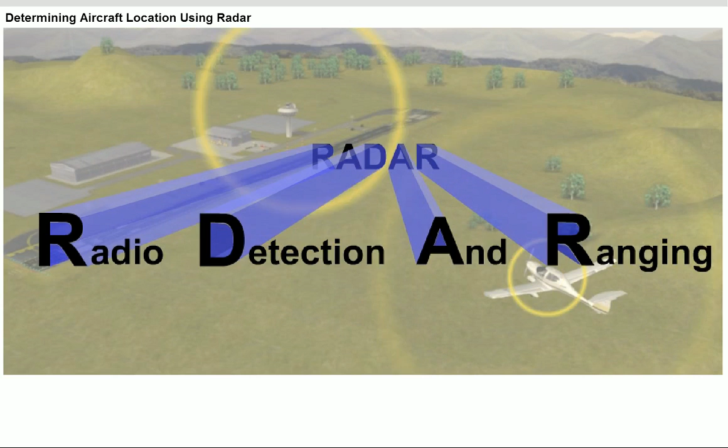Radar, which stands for Radio Detection and Ranging, is a ground-based electronic system that uses a synchronized radio transmitter and receiver to emit and detect radio waves in a narrow beam using a rotating antenna. When the radio waves strike your aircraft, some of the waves reflect back to the antenna. The primary radar system uses this information to display the location of your aircraft on the radar screen.

The system calculates your range, or the distance of your aircraft from the radar antenna, by measuring the time it takes for the radio waves to reach your aircraft and then return to the receiving antenna. The radar screen also displays the magnetic direction, or azimuth, of your aircraft from the radar site, based on the position of the rotating antenna when it receives the reflected portion of the radio wave.

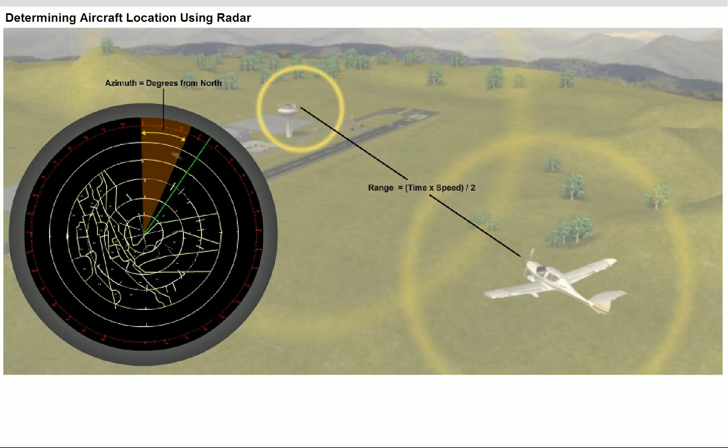Although primary radar displays your location on the radar screen, it provides the controller with no further information, such as your identification, altitude, or speed. To overcome these limitations, ATC might simultaneously use the air traffic control radar beacon system, which is sometimes referred to as secondary surveillance radar or simply secondary radar.

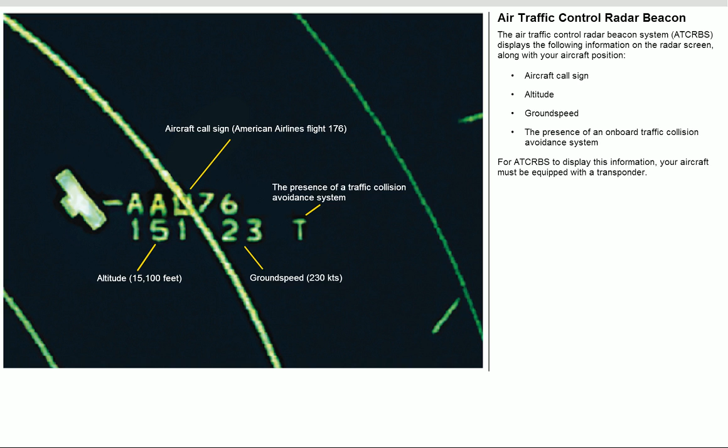This system displays your aircraft call sign, the altitude of your aircraft, and its ground speed. In addition, it indicates whether your aircraft is equipped with a traffic collision avoidance system by displaying the letter T. For ATCRBS to display this information, your aircraft must be equipped with a transponder.

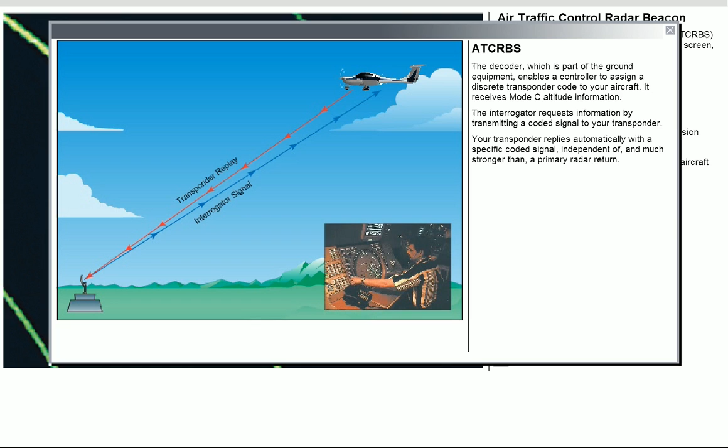The ATCRBS incorporates three components in addition to primary radar: a decoder, which enables a controller to assign a discrete transponder code to your aircraft; an interrogator, which requests information from your transponder; and a transponder, which transmits a coded signal in response.

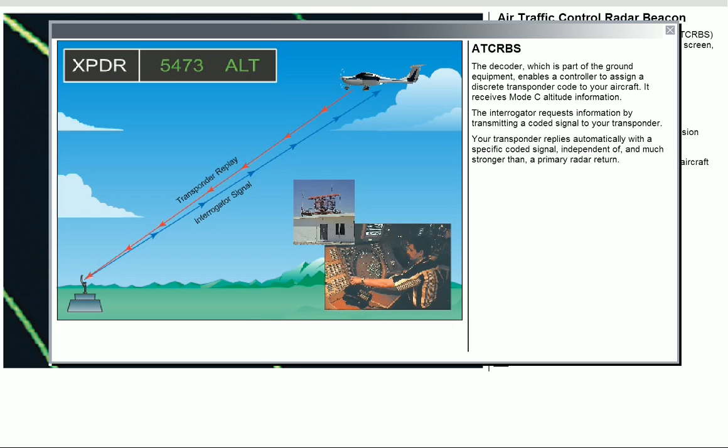In spite of its capabilities, radar has some significant limitations. Atmospheric temperature inversions can cause anomalous propagation, or the bending of radar pulses. If the radar beam bends toward the ground, extraneous returns known as ground clutter can appear on the radar screen. A beam that bends upward reduces the detection range.

In addition, heavy precipitation or heavy clouds can produce returns that block out the display of aircraft. Finally, terrain can block radio waves from reaching or returning from the aircraft.

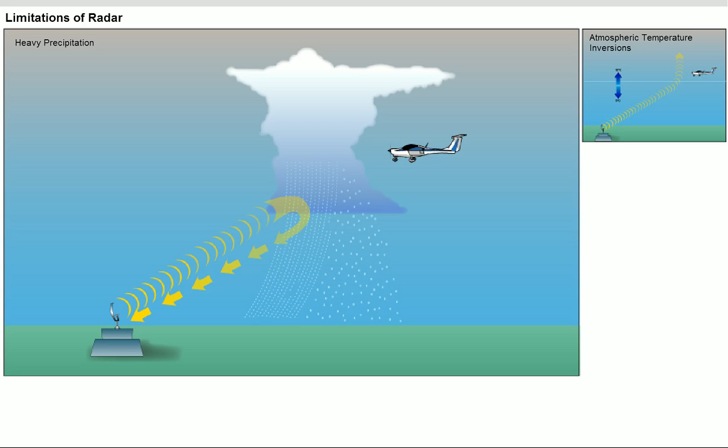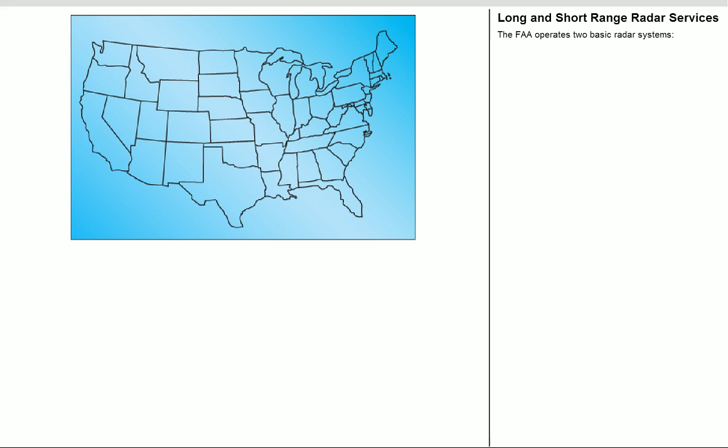The FAA operates two basic radar systems: air route surveillance radar and airport surveillance radar. Both of these surveillance systems use primary and secondary radar returns, as well as sophisticated computers and software programs that provide additional information to the controller, such as aircraft speed and altitude.

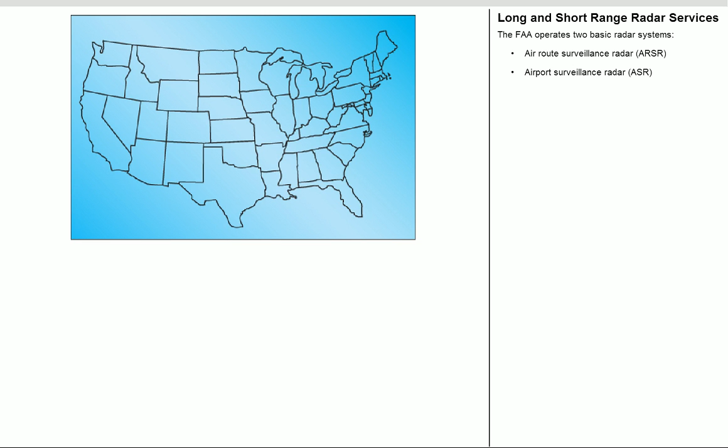The Air Route Surveillance Radar System, or ARSR, provides long-range information to help controllers manage traffic. Each radar site antenna can monitor aircraft flying within a 200-mile radius of the antenna, with some stations able to monitor aircraft as far away as 600 miles by using remote antenna sites.

Approximately 100 ARSR facilities relay traffic information to radar controllers throughout the country at 20 Air Route Traffic Control Centers, or ARTCCs. These centers issue IFR clearances and manage IFR traffic. However, depending on workload, these centers can also provide services to VFR pilots. For example, you might request flight following services, in which controllers provide traffic advisories to you. Because of their extensive radar coverage, centers can provide assistance if you become lost or disoriented.

Airport Surveillance Radar, or ASR, provides relatively short-range coverage, approximately 30 miles, within specific terminal areas. Terminal radar approach control facilities, called TRACONs, use this information to ensure safe separation of aircraft transitioning from departure to cruise flight or from cruise to a landing approach.

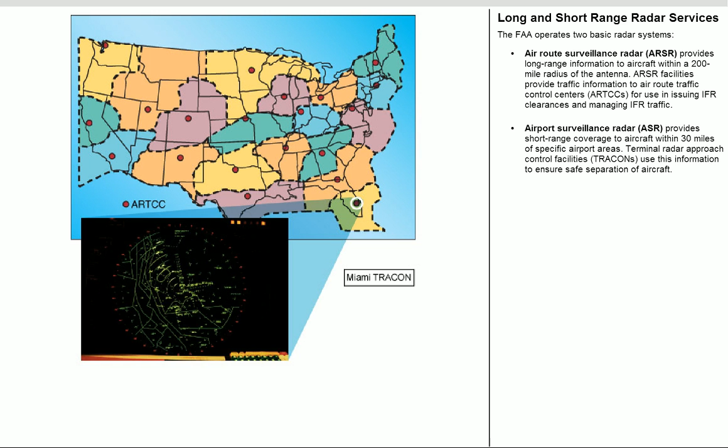Most ASR facilities throughout the United States use a form of the Automated Radar Terminal System, or ARTS. ARTS increases the number of aircraft that one controller can handle at a given time by reducing the amount of verbal communication necessary between controllers and pilots to relay position information.

ARTS equipment automatically displays aircraft position, altitude, ground speed, and other pertinent information on a controller's radar screen. ARTS continuously updates this information as the aircraft progresses through the terminal area. To gain maximum benefit from the system, each aircraft in the area must be equipped with a Mode C or Mode S transponder and the associated altitude encoding altimeter, although this is not an operational requirement.

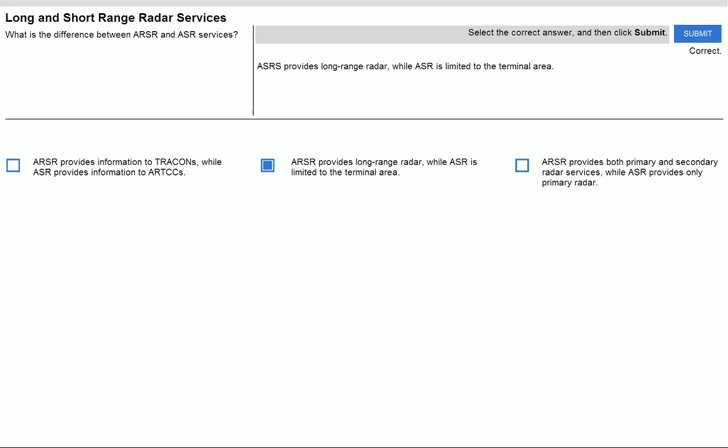Although radar can detect your aircraft without it, a transponder enhances the display visible on the ATC radar screen. The information displayed depends on the mode of your transponder. Basic transponders operate only in Mode A, which brightens the display and adds your transponder code to the radar screen. Your transponder code may be any of 4,096 different codes.

In addition to the basic features, Mode C transponders also provide altitude information to the radar screen. Mode C transponders are required in all Class A, B, and C airspace, within 30 miles of primary Class B airspace airports, and any time that you are above 10,000 feet.

Mode S transponders have advanced features including the ability to identify your aircraft to other aircraft equipped with Mode S transponders. For example, operation of the Traffic Alert and Collision Avoidance System, or TCAS, depends on Mode S transponder technology. There are other transponder modes, but they're not commonly used in the United States.

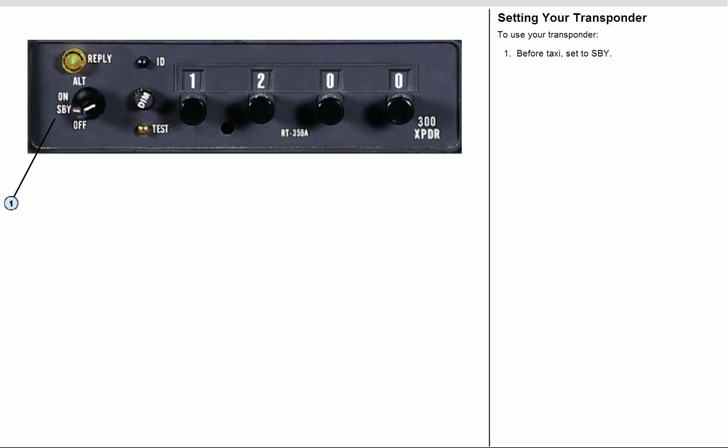To use your transponder, follow these steps. Before taxiing to the runway for takeoff, use the function selector to set your transponder to standby. In the standby position, the transponder is ready for operation, but it doesn't reply to interrogations. Set the transponder to the code assigned by ATC, or if you're flying VFR, select 1200.

A typical transponder can be set to display any number between 0 and 7 for a total of 4,096 possible codes. As late as practical before takeoff, change the mode to altitude or on. Use the on setting only if your transponder doesn't have Mode C capability.

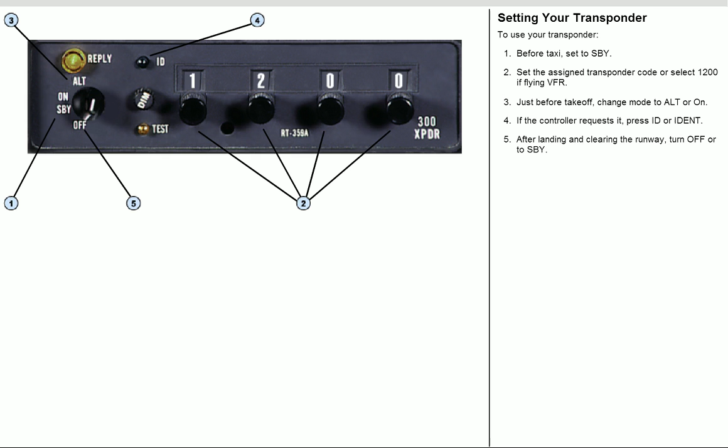If the controller requests it, press ID or ident. Pressing the ident button causes the transponder return to blossom on the radar screen for a few seconds, which enables the controller to establish positive radar contact. After landing and clearing the runway, turn your transponder off or to standby as soon as practical. To familiarize yourself with the transponder controls, click the dials to change the settings on this transponder before moving on.

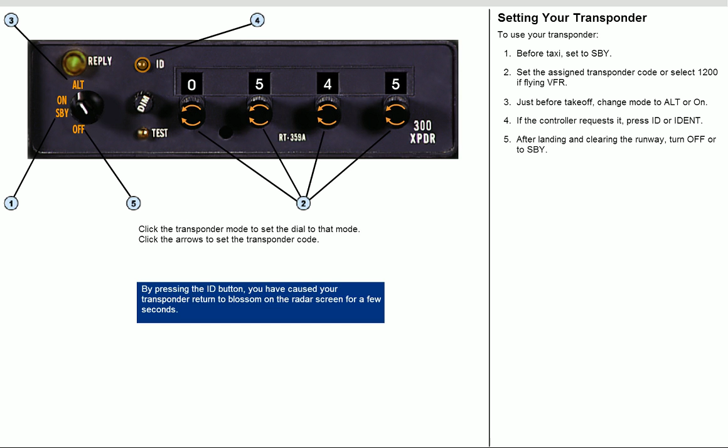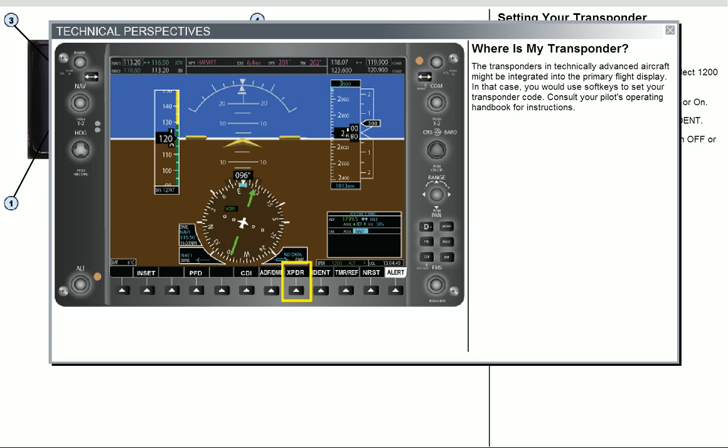Squawk 1257. Squawk standby. Stop altitude squawk. Squawk altitude. Ident. Squawk 1257 and ident. Squawk low. Stop squawk. Squawk mayday. Squawk VFR.

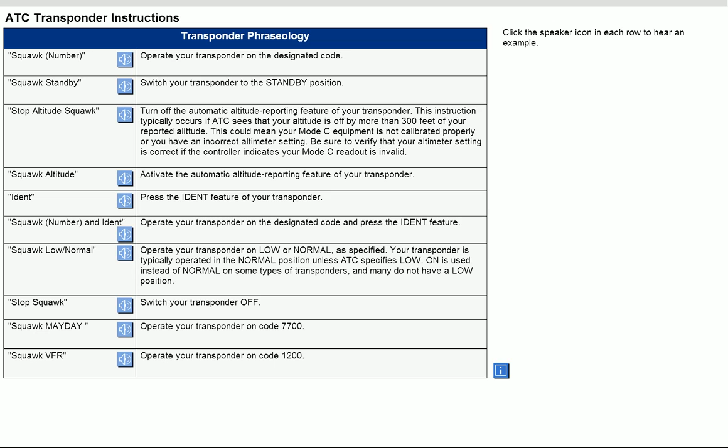In cases where your altitude readout differs more than 300 feet from your reported altitude, the controller will issue a Stop Altitude Squawk instruction. This means that you should turn off Mode C, but continue to operate your transponder in Mode A. This condition might mean that your Mode C equipment isn't calibrated properly or that your altimeter setting is incorrect. Be sure to verify your altimeter setting if the controller indicates that your Mode C readout is invalid.

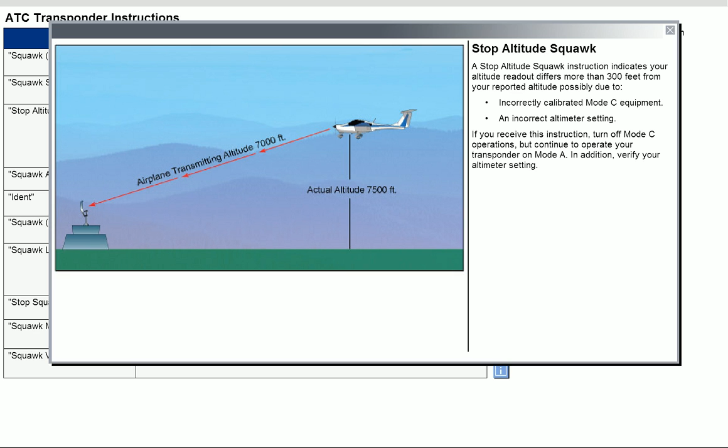Certain transponder codes are reserved for specific situations. The table lists the codes you should be familiar with. Because the emergency codes immediately alert ATC and activate an alarm, you should avoid accidentally dialing through these numbers, even momentarily. For example, if you want to switch from code 2700 to code 7200, switch first to 2200, then to 7200. Don't switch to 7700 and then to 7200. The simplest way to remember this is to avoid entering 7 into the first box as your first step, unless you're going to use an emergency code.

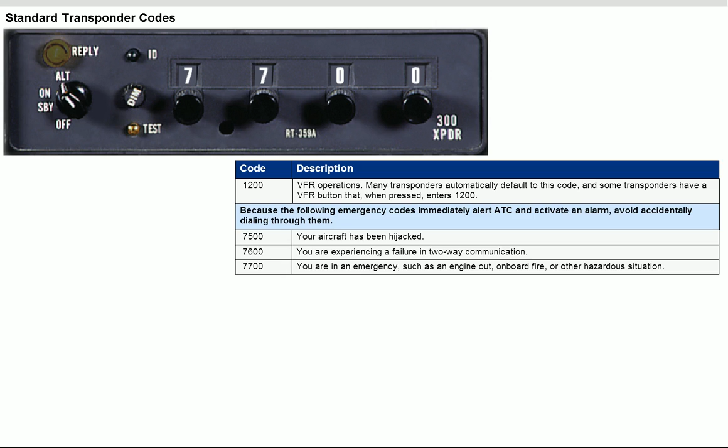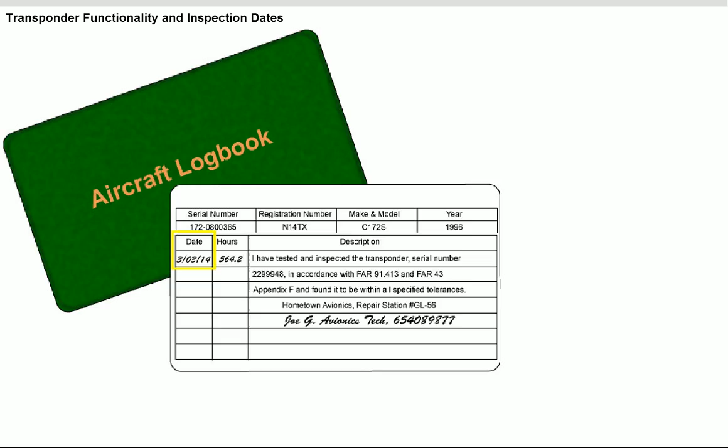Because transponder returns are the basis for radar separation, regulations require that transponders be tested and inspected every 24 calendar months for operations in controlled airspace. The inspection must be done by a radio shop and the results entered into the aircraft logs. In addition, if your transponder has a test button, it's a good idea to verify that all lights are working each time you fly.

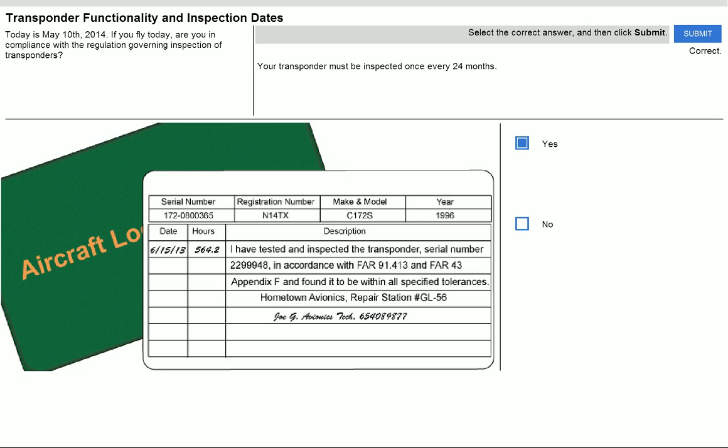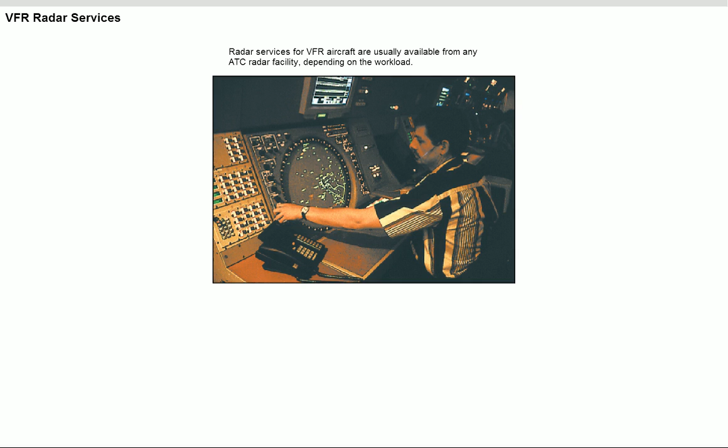Radar services for VFR aircraft are usually available from any ATC radar facility, including air route traffic control centers and airport surveillance radar facilities in terminal areas. The types of service depend on the facility and on how busy the air traffic controllers are, but can include any of the following. ATC radar facilities routinely provide traffic information to IFR aircraft. As the pilot of an aircraft flying VFR, you can request Radar Traffic Information Service, also called VFR Radar Advisory Service, to alert you to air traffic relevant to your flight.

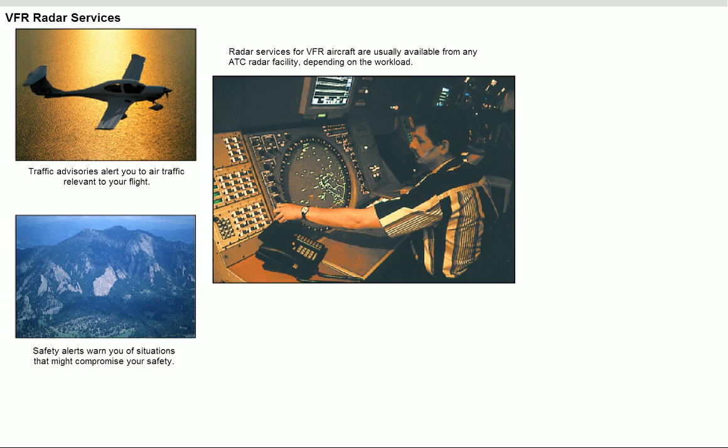ATC radar facilities issue safety alerts to aircraft under their control when, in the controller's judgment, safety might be compromised. For example, you might receive a safety alert if you're in unsafe proximity to terrain, obstructions, or other aircraft. ATC radar facilities might provide vectors to VFR aircraft in certain situations, with the understanding that the navigational guidance information is only advisory, and the job of flying the aircraft safely remains with the pilot.

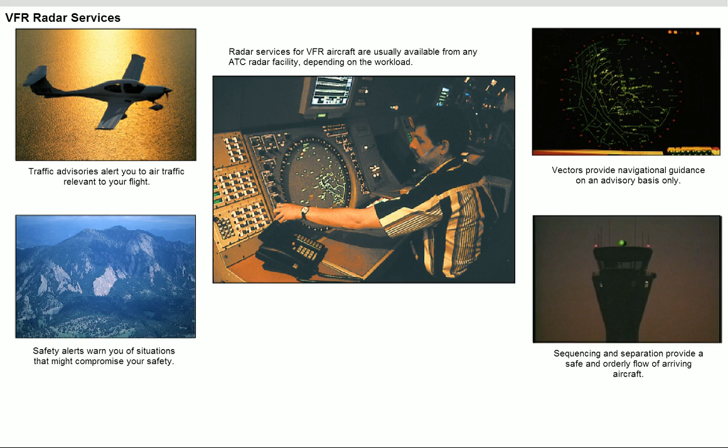ATC facilities might also provide sequencing and separation to adjust the flow of aircraft arriving into the traffic pattern in a safe and orderly manner, and to provide traffic advisories to departing VFR aircraft. These services may all be included in the Terminal VFR Radar Service Program, a national program extending the terminal radar services for IFR aircraft to VFR aircraft. Check the Airport Facility Directory for any services provided under this program at a given airport.

78 Juliet Romeo, traffic at 11 o'clock.

The purpose of VFR Radar Advisory Service is to alert you to possible conflicting traffic, not to relieve you of your responsibility for collision avoidance. Remember that the controller won't know the altitude of the reported traffic if it isn't equipped with a Mode C transponder and the pilot isn't in communication with ATC. Therefore, the traffic might be well above or below your flight path.

After you locate the traffic, tell the controller that you have the traffic in sight and maintain visual contact until it's no longer a factor. If you don't immediately see the traffic, reply to the controller that you're looking for traffic. And if you can't find it, tell the controller negative contact.

78 Juliet Romeo, low altitude alert. Climb to 5,300 immediately.

Keep in mind that safety alerts depend on the controller's ability to recognize unsafe situations, that uncontrolled aircraft are often involved, and that Mode C altitude readouts are the primary method of detecting unsafe proximity. Safety alerts aren't automatic, although you can request a minimum safe altitude warning or MSAW monitoring if your aircraft is equipped with Mode C. MSAW alerts the controller when an aircraft is in unsafe proximity to terrain or obstructions.

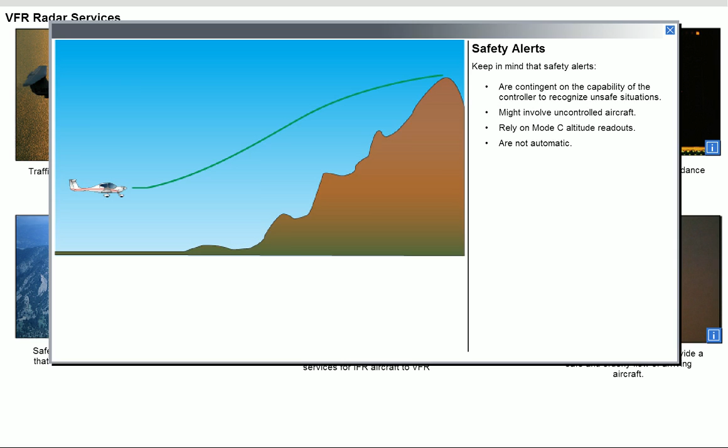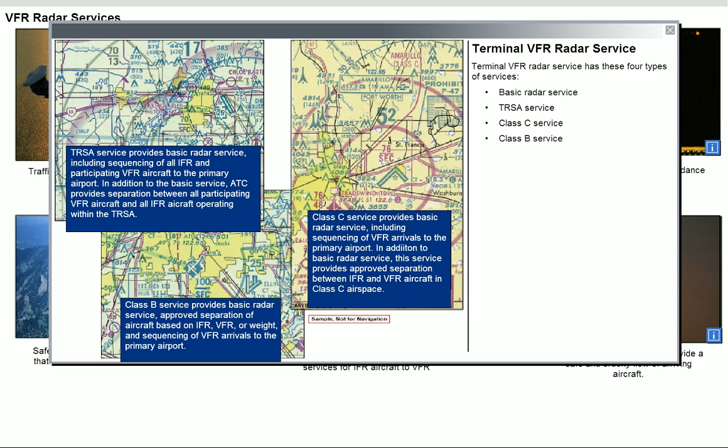The Terminal VFR Radar Service Program has 4 types of services. Basic radar service that includes safety alerts, traffic advisories, and limited radar vectoring. Terminal Radar Service Area or TRSA service. Class B service, and Class C service. Pilots operating under VFR must participate in Class B and C services, but Basic and TRSA services are voluntary, though strongly encouraged.

78 Juliet Romeo, fly heading 110 until you cross the power lines, then resume course.

ATC might provide vectors if the controller suggests the vector and you agree, if a special program has been established and vectoring service has been advertised, or when, in the controller's judgment, the vector is necessary for air safety. If you have radar vectors, keep the controller advised of the weather conditions along your course. In many cases, controllers cannot determine whether a vector will result in flight into IFR conditions.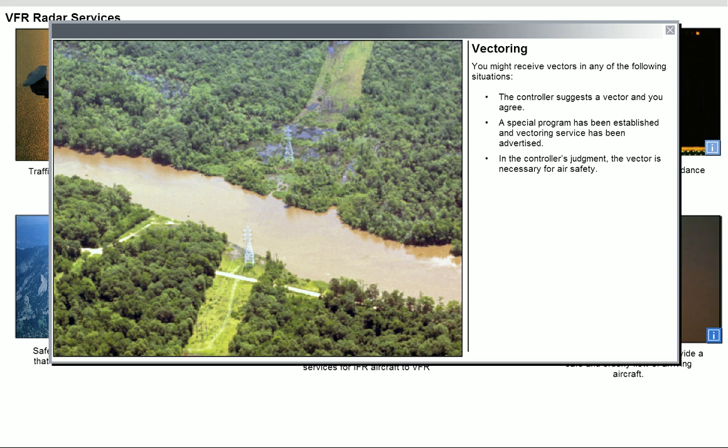78 Juliet Romeo, follow the aircraft at your 12 o'clock position, 4 miles. Do you have that traffic in sight?

Depending on traffic conditions, you can use your own navigation to enter the traffic pattern, or approach control might provide you with routing or vectors for proper sequencing with other traffic en route to the airport. If you report having a preceding aircraft in sight, the controller might instruct you to follow that aircraft. However, you aren't authorized to comply with any instructions issued to the preceding aircraft.

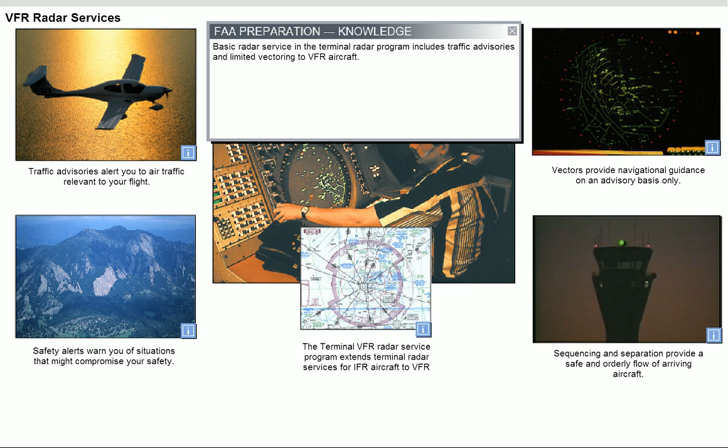When giving traffic alerts, ATC references traffic from your aircraft as if it were a clock with 12 o'clock at the nose. For example, if a controller says traffic at 11 o'clock, it means the traffic appears to the controller to be 30 degrees left of the aircraft nose. You should look for the traffic anywhere between the nose and the left wing of your aircraft, or between 12 and 9 o'clock. However, keep in mind that wind correction angles don't show up on radar, so you need to adjust the controller's advisory accordingly, as this illustration shows.

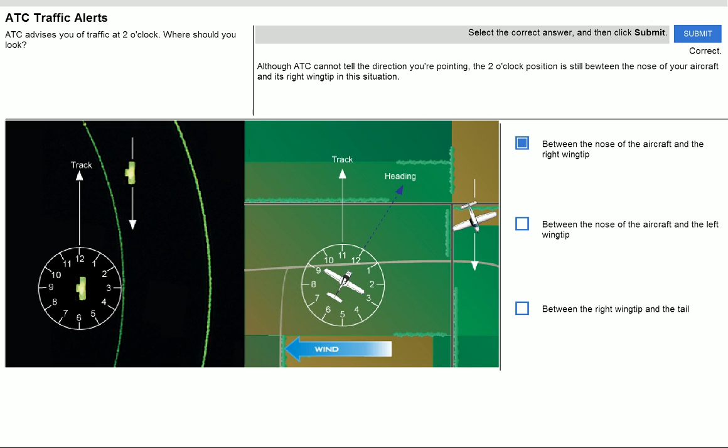At busy airports, it's difficult and time-consuming for controllers to provide every aircraft with a separate airport advisory, so they use the Automated Terminal Information Service, or ATIS, to continuously broadcast non-control airport information, such as weather, runway, and NOTAM information. By pre-recording this information, they improve controller effectiveness and reduce frequency congestion. ATC changes the recorded message whenever conditions warrant, identifying each new recording by assigning it a successive letter of the phonetic alphabet.

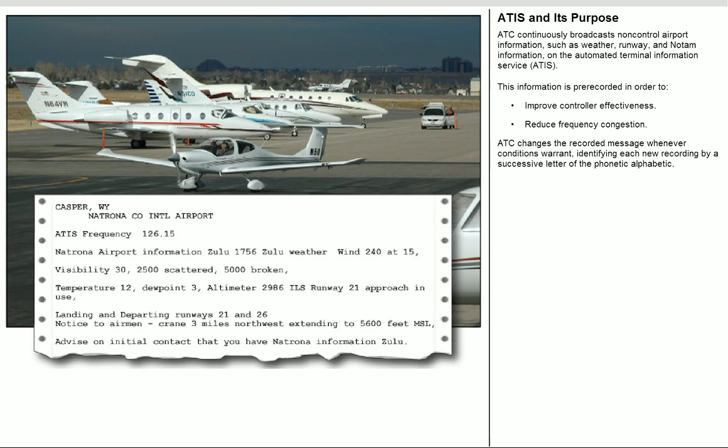You can locate ATIS frequencies on VFR charts, such as sectional or terminal area charts, or in the Airport Facilities Directory. The ATIS broadcast can be confusing unless you know the information order. Listen to the following ATIS broadcast and note the order that the information appears on the screen.

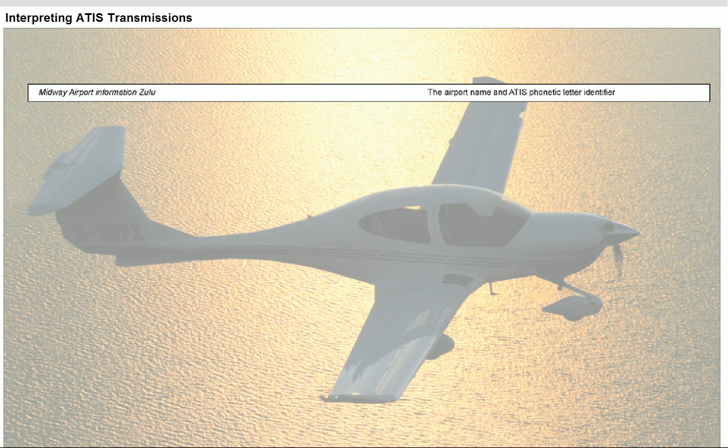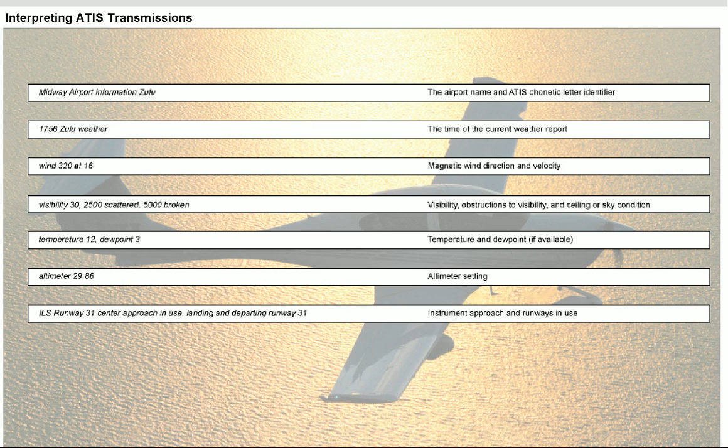Midway Airport Information Zulu. 1756 Zulu weather. Wind 320 at 16. Visibility 30. 2,500 scattered, 5,000 broken. Temperature 12, dew point 3. Altimeter 2986. ILS runway 31 center approach in use. Landing and departing runway 31. Notice to airmen. Crane 3 miles northwest extending to 850 feet MSL, 230 feet AGL. Advise on initial contact that you have information Zulu.

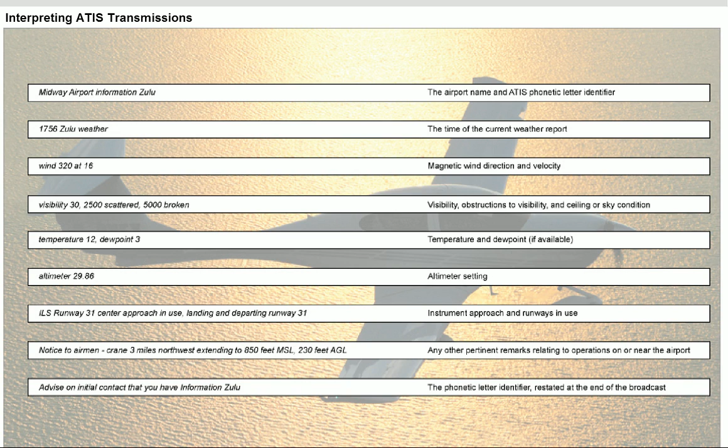If the sky condition and ceiling are absent from the broadcast, it means that the visibility is 5 miles or more, and that the ceiling is 5,000 feet or higher. Although you can listen to the broadcast as many times as necessary, you might find it helpful to write down the ATIS information. For helpful shorthand tips, click More Information.

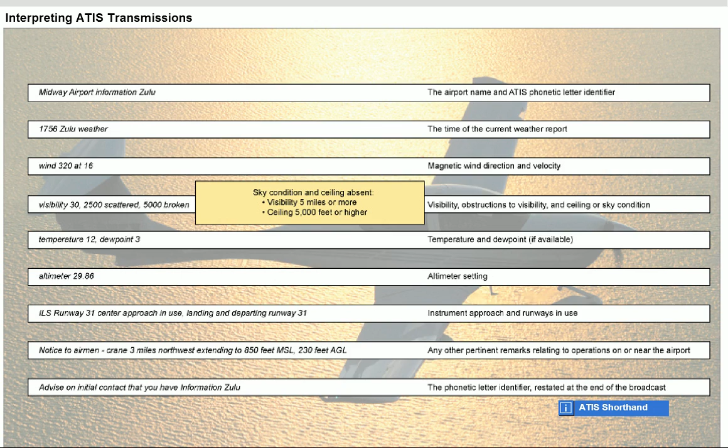You probably won't be able to copy the ATIS word for word unless you listen to it several times, but you can get the important information if you use a piece of paper with these headings along the left side. Then, using abbreviations for the items listed, you can easily fill in the blanks on one pass through the ATIS.

Gary, Chicago International Information Bravo, 1355 Zulu weather, wind 310 at 12, visibility 10, 4,500 broken, temperature 18, dew point 10, altimeter 2982, ILS runway 30 approach in use, landing and departing runway 30. Notice to airmen. Numerous birds on and in the vicinity of the airport. Advise on initial contact you have information Bravo.

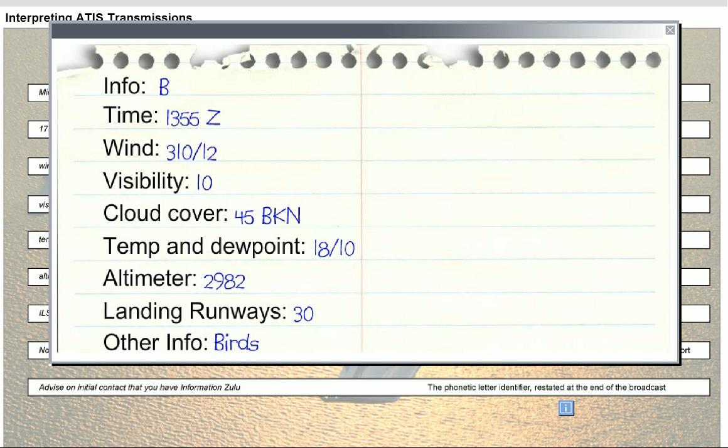You can review other shorthand abbreviations in the Key to Aerodrome Forecast and Aviation Routine Weather Report figure in the Aeronautical Information Manual, Chapter 7, Section 1, Paragraph 22.

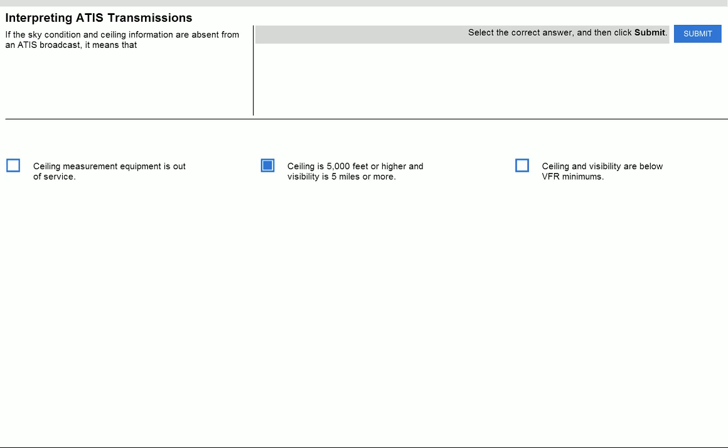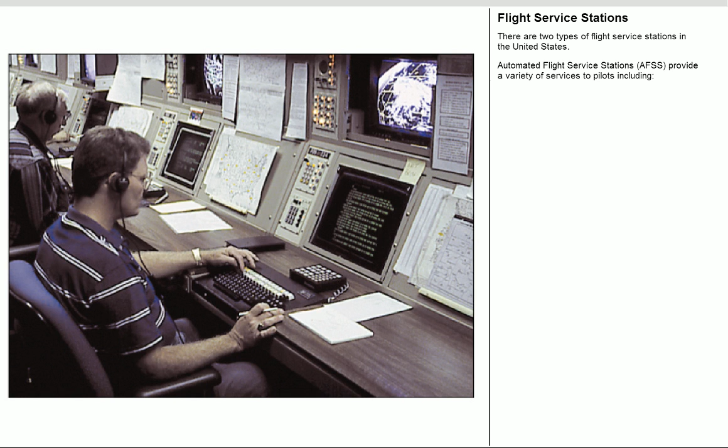Flight service stations developed from the radio stations that were established along airmail routes in the 1920s to provide weather information to pilots. Today, there are two types of flight service stations in the United States. Automated flight service stations, abbreviated AFSS, are facilities that provide a variety of services to pilots, including weather services such as weather briefings, collecting and disseminating pilot reports on weather and flight conditions, and broadcasting aviation weather and airspace information.

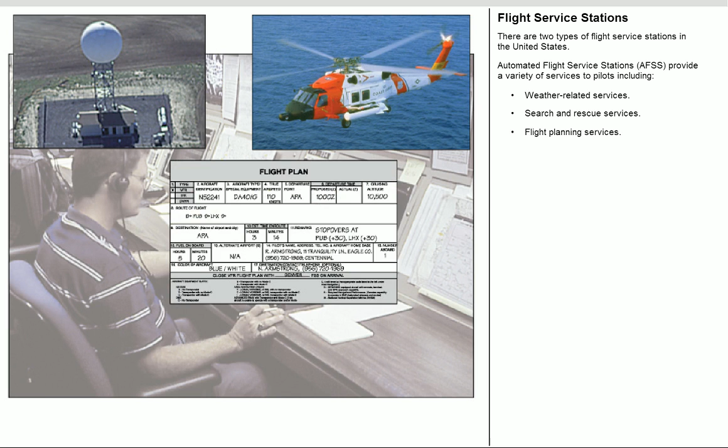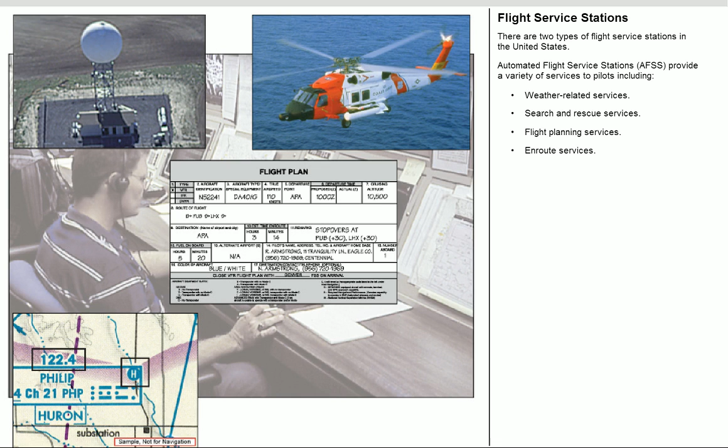Search and rescue services, as well as assisting lost aircraft and aircraft in emergency situations. Flight plan services, such as filing, activating, and closing flight plans, and advising customs and immigration of transborder flights. En route services, such as facilitating en route communication, providing en route weather service, and relaying ATC clearances. And additional services, such as originating NOTAMs, issuing airport advisories, and monitoring navigational aids. Private contractors operate AFSS facilities for the federal government.

The second type of flight service station is operated by the FAA itself. These facilities, abbreviated FSS, provide all of the services of an AFSS, plus some additional services. The remaining FAA-operated flight service stations are all in Alaska. When an FSS is located on an airport, it provides local airport advisory service to pilots when there is no control tower or if the control tower is not operating. The FSS even provides a service like ATIS at some airports.

VHF direction-finding is another service available at some facilities. Stations equipped with DF equipment can help orient lost pilots and determine their position. The only equipment needed in the aircraft is a two-way VHF radio. This service is particularly helpful in areas where there is no ATC radar coverage. However, it's being replaced by newer technology like ADS-B and GPS.

Air route traffic control centers and automated flight service stations alert the search and rescue system when they receive information from any source that an aircraft is in difficulty, overdue, or missing. Federal and state agencies jointly provide this life-saving service. Usually, the Civil Air Patrol, a civilian extension of the U.S. Air Force, assists in search and rescue operations.

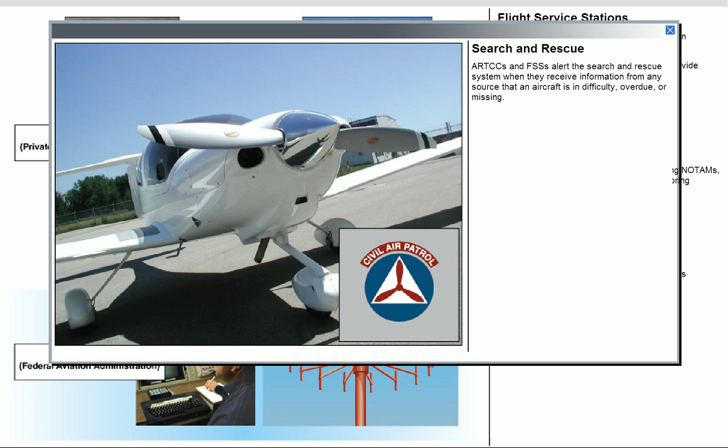Flight plan information is invaluable to search and rescue forces for search planning and for carrying out search efforts. You should make occasional position reports so that the flight service station has an idea of your last known position if you don't arrive at your destination. Although the FAA doesn't require VFR pilots to file flight plans, doing so enables search and rescue teams to locate you more quickly in the event of an emergency landing.

Filing a flight plan with an automated flight service station generates a record that includes your destination, route of flight, arrival time, fuel endurance, color of your aircraft, and the number of people on board. After you're airborne, open your flight plan so the station can keep track of your estimated arrival time. If you decide not to proceed to your original destination, or if you're going to be more than 15 minutes late, inform the nearest flight service station.

Close your flight plan within 30 minutes after arrival, because if you haven't closed or canceled your flight plan within 30 minutes after your estimated arrival time, the flight service station might initiate search and rescue procedures, and you could be liable for the costs.

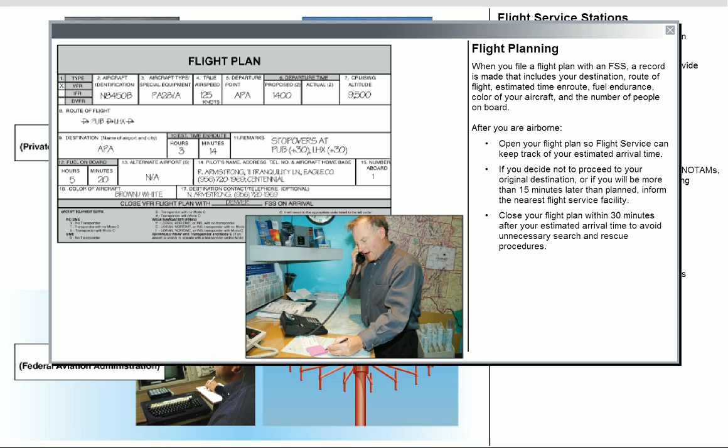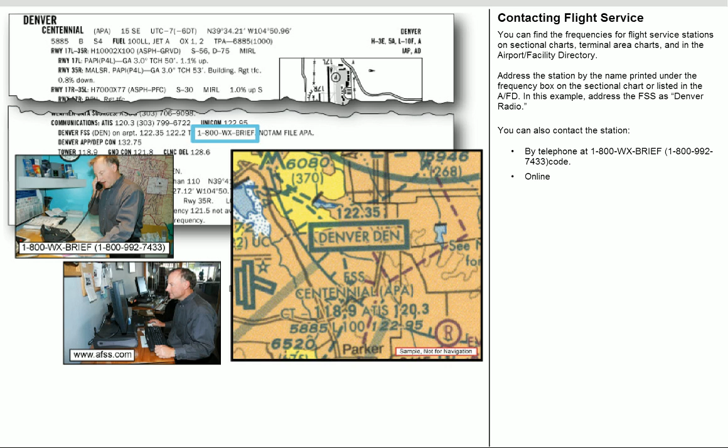You can find the frequencies for automated flight service stations throughout the U.S. on sectional charts, terminal area charts, and in the Airport/Facility Directory. Address the station by the name printed under the frequency box on the sectional chart or listed in the A/FD. In addition, you can contact the station by telephone or on the Internet. But keep in mind that if you call on your mobile phone, your call will be directed to the flight service station closest to your local area code, not to the station for the region you're in.

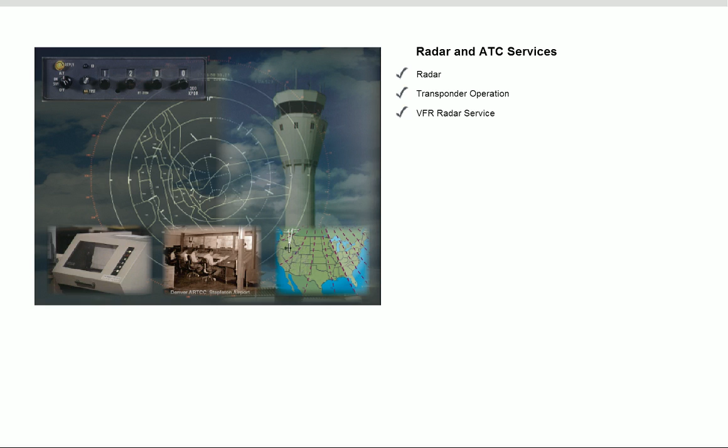In this lesson, you learned about the ATC services available to you by exploring these topics: radar, transponder operation, VFR radar service, automatic terminal information service or ATIS, and flight service stations.